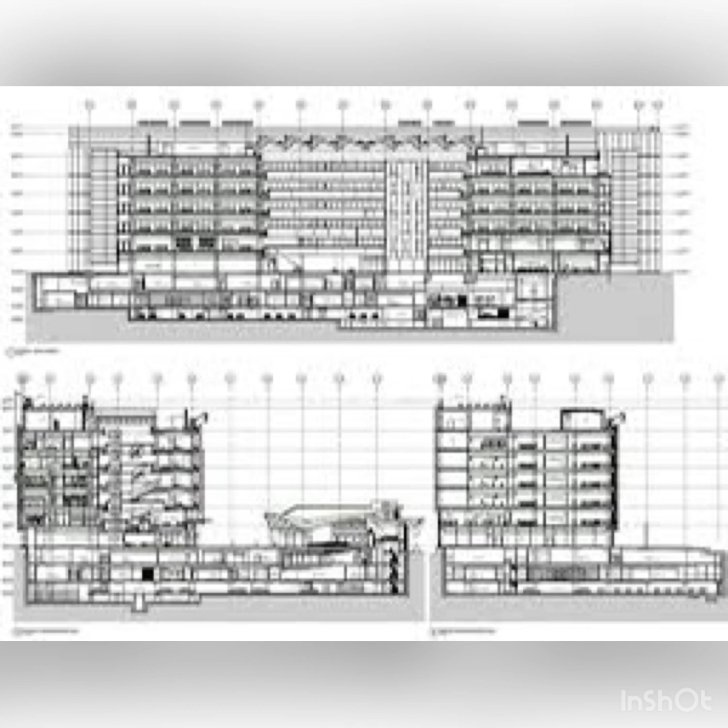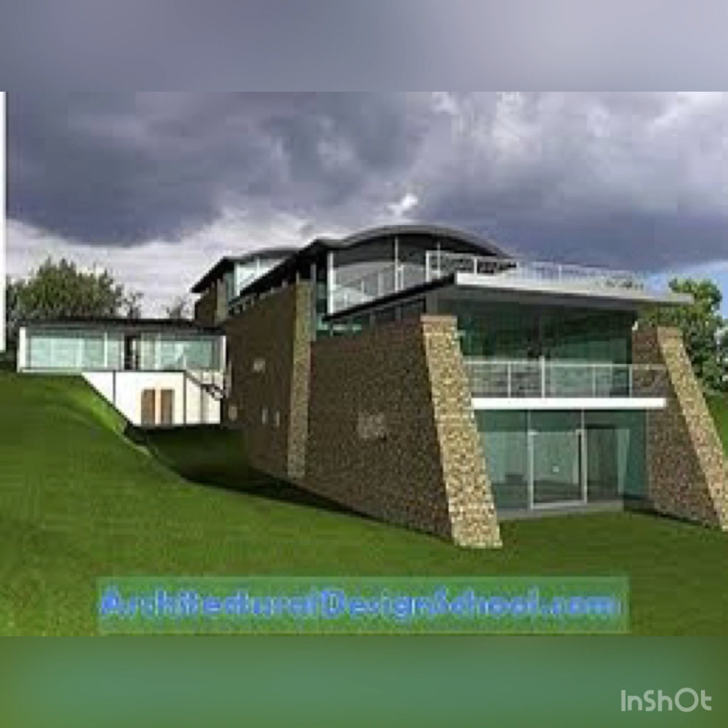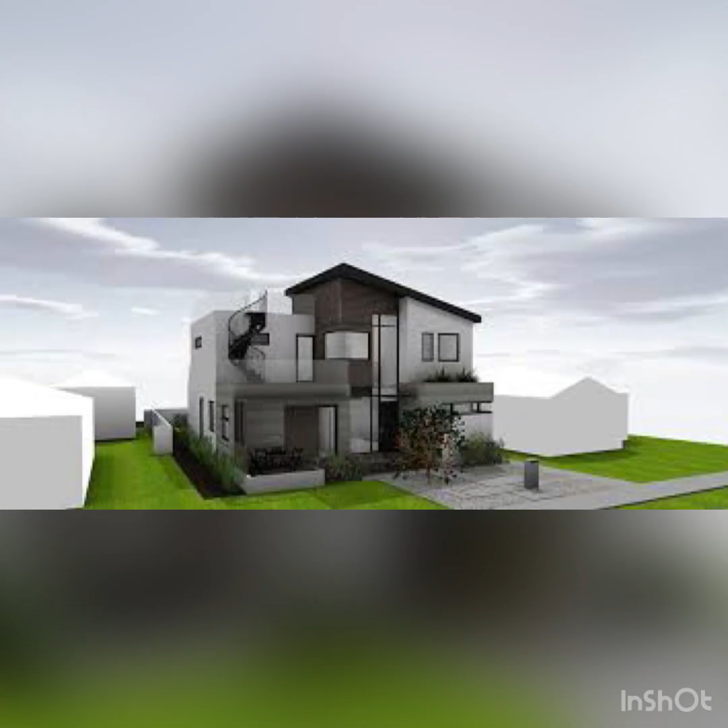The number of hours that are necessary for the production of drawings has decreased steadily over time with the general trend of non-agricultural work in the United States since 1964. Widening through the length of the database contributed to the breakdown of architecture into its constituent components, requiring a literal taxonomy of the constituent parts of a building.

This program uses a graphical user interface, perspective and orthography widgets, and a sortable database that allows the user to retrieve information categorically by attributes, including material type and supplier.

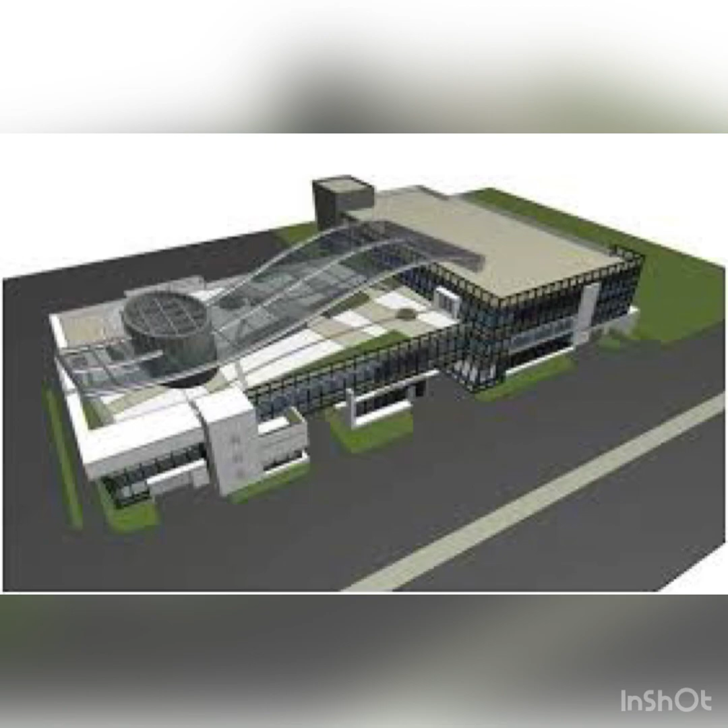But BIM is not a design or visualization tool, it is a process that allows the creation of a shared data model. This model is available to all interested parties, from designers, students, and ordinary people.

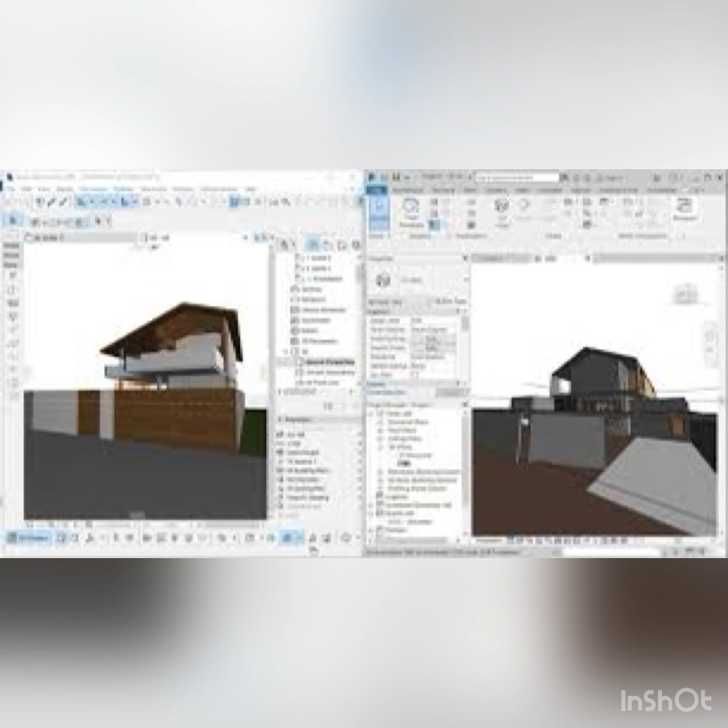In the early 1980s, several systems were developed in England and gained ground and were applied to real projects. These include GDS, EdCAA, CEDAR, RUCAPS, Sonata, and Reflex.

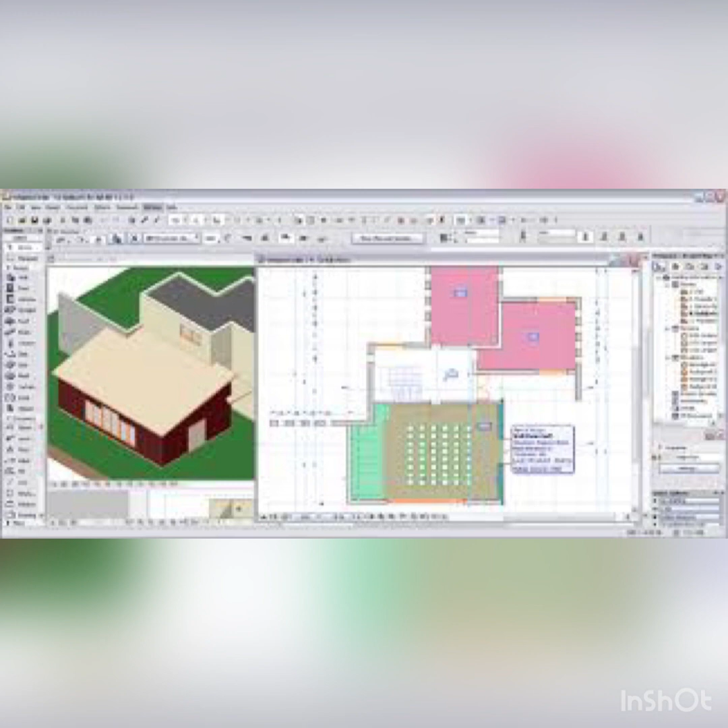The RUCAPS software system developed by GMW Computers in 1986 was the first program to use the concept of time-phased construction process and was used to assist in the phased construction of Terminal 3 at Heathrow Airport.

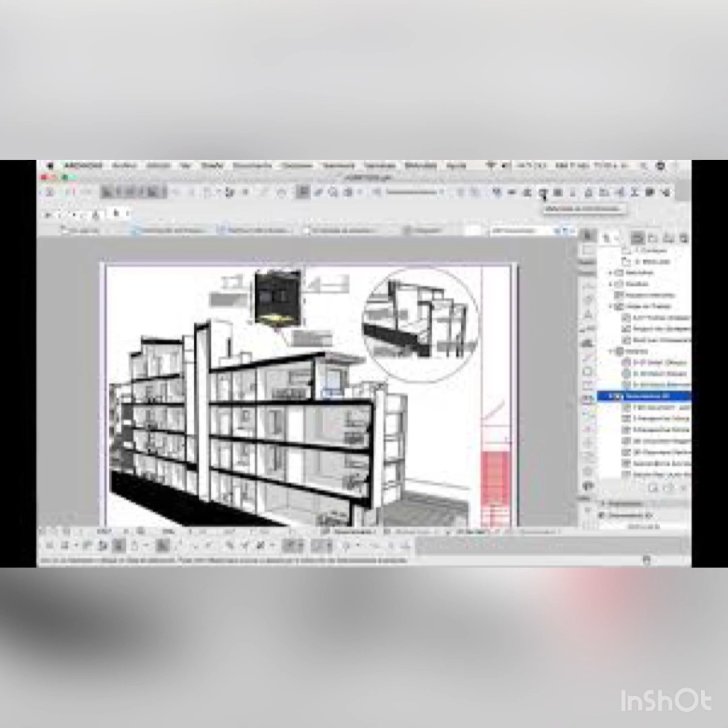This marks an important point where two trends in the development of BIM technology will divide and develop over the next 2 decades. On the one hand, the development of specialist tools for multiple disciplines at the service of the construction industry and improving construction efficiency. On the other hand, there is the treatment of the BIM model as a prototype that could be tested and simulated according to performance criteria.

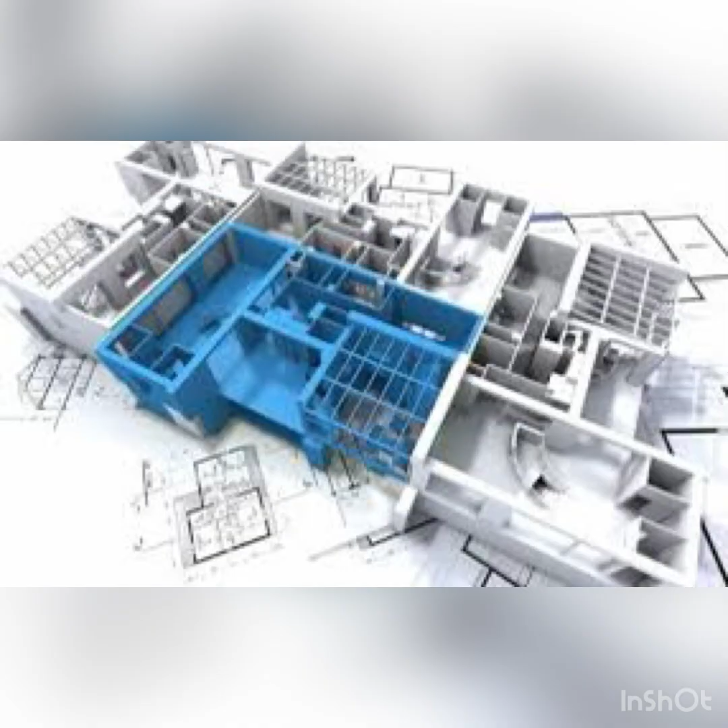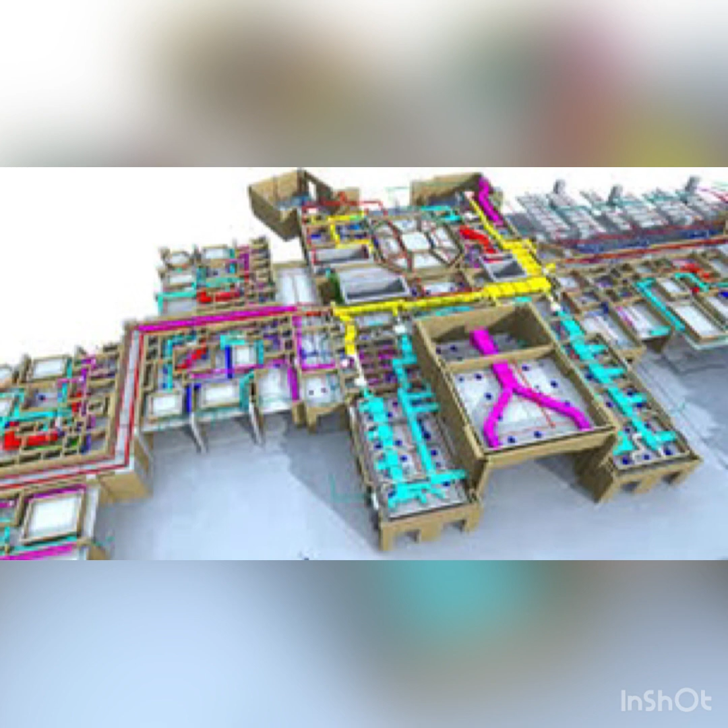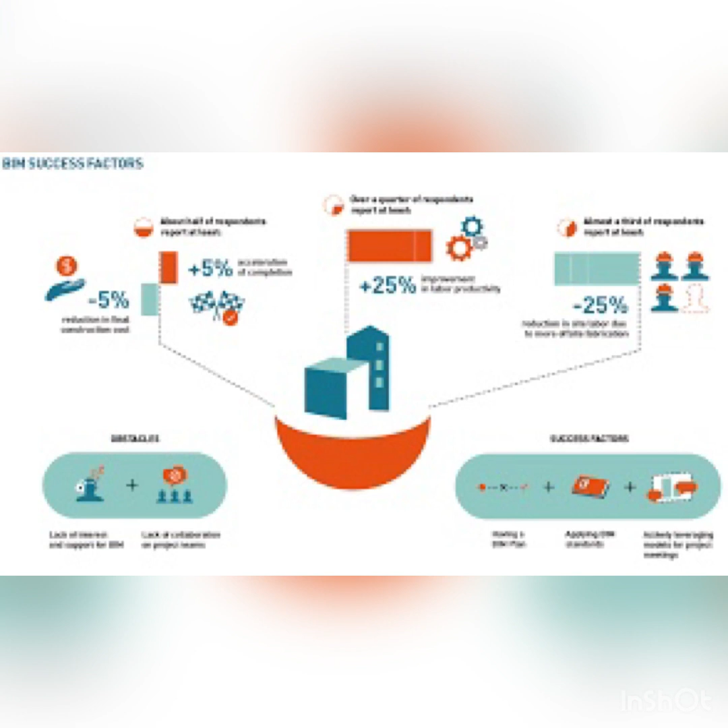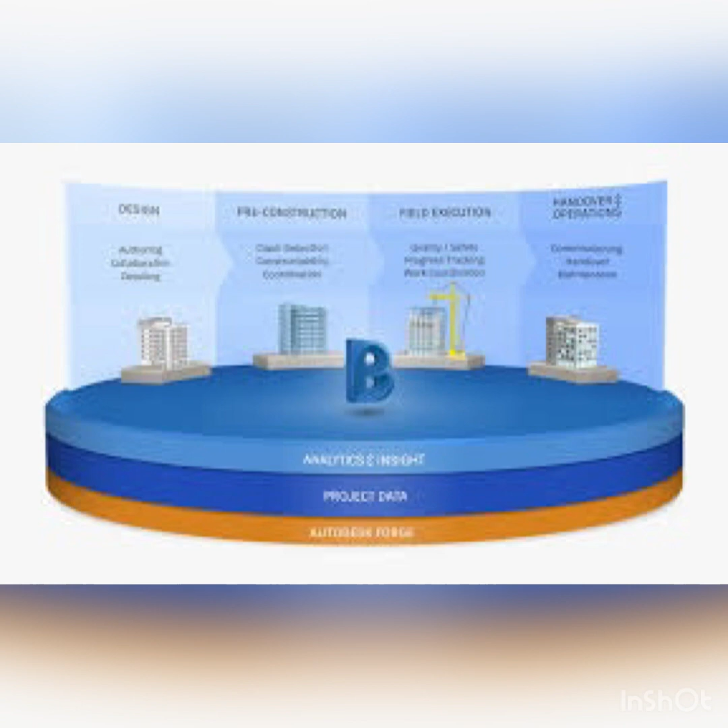Recent improvements have made Archicad a major player in the market despite fundamental issues like the lack of a phase component and a complex programming environment. The two wanted to create an architectural version of the software that could handle more complex projects than Archicad.

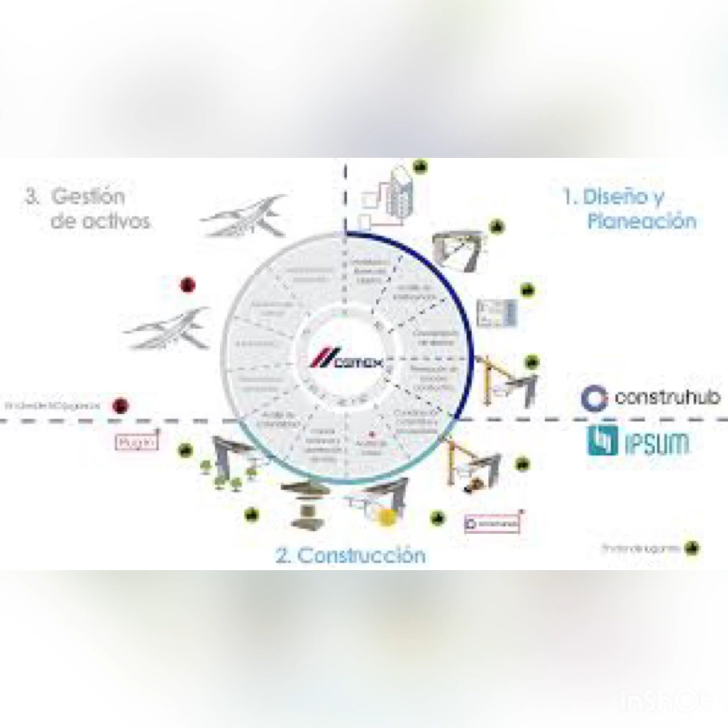They hired David Conant as their first employee, who is a trainer at Schirtete, and designed the initial interface that lasted for 9 versions, revolutionizing the world of building information modeling by creating a platform that uses a visual programming environment to create parametric families and allow a time attribute to be added to a component, which allows a 4th dimension of time to be associated with the building.

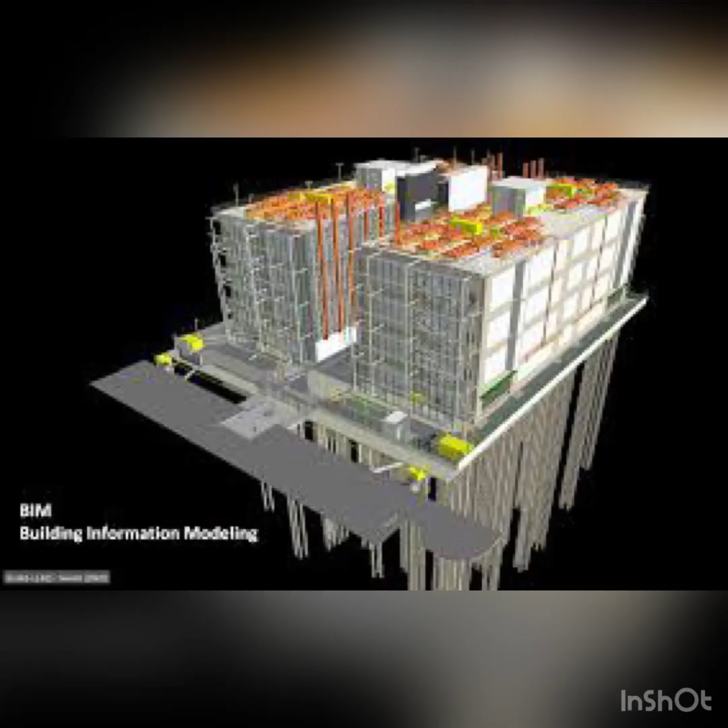This allows generating construction schedules based on the BIM models and simulating the construction process. Separate but linked models were linked to programs to provide estimates of costs and quantities of materials in real time.